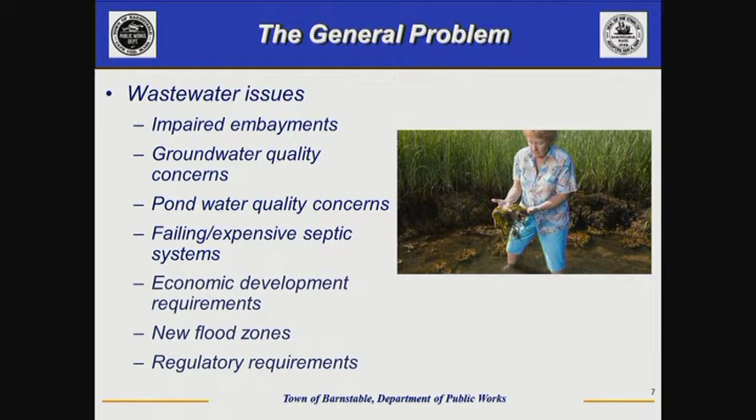The county and the Cape Cod Commission championed what you've probably heard of as the 208 process. The 208 process is a Clean Water Act report that they needed to update, but that really focuses on the embayments, principally marine embayments, and principally nitrogen to those embayments. Nitrogen in a marine environment is the limiting factor to growth—everything else is present for algae to bloom or other things to rapidly grow, with the exception of nitrogen. So if you add nitrogen, you will cause rapid growth. Conversely, in ponds, phosphorus does that, not nitrogen. So freshwater, phosphorus causes rapid growth; saltwater, marine waters, nitrogen causes rapid growth.

Where that nitrogen is coming from is listed here under the origins on the slide. This is from the 208 report itself, and the two charts here basically show similar versions of the same thing. The one on the left is total nitrogen within the system, specialized to Cape Cod. Though it's difficult to read, the blue on the far right is septic load—about 65 to 67% of the total nitrogen on Cape Cod.

More interesting is the chart on the right—that's total controllable nitrogen, the nitrogen we could potentially affect. Basically, atmospheric deposition has been taken out. What you'll see there is that septic load now accounts for 70 to 80% of the total controllable nitrogen on Cape Cod. It's also interesting to note that fertilizer is about 9% and stormwater is about 9%. So those are the three highest nitrogen contributions that we can change or in any way control going forward.

All right, so back to the fundamentals. Let's talk about what nitrogen in a system does in a marine body. If we have a healthy ecosystem with healthy levels of nutrients, algae growth will be limited by the lack of nitrogen. Sunlight will penetrate the water, and you will have aquatic grasses—in our case eelgrass—that will grow. They'll provide habitat, provide food, and also create oxygen. And organisms are happy, healthy, and do their thing.

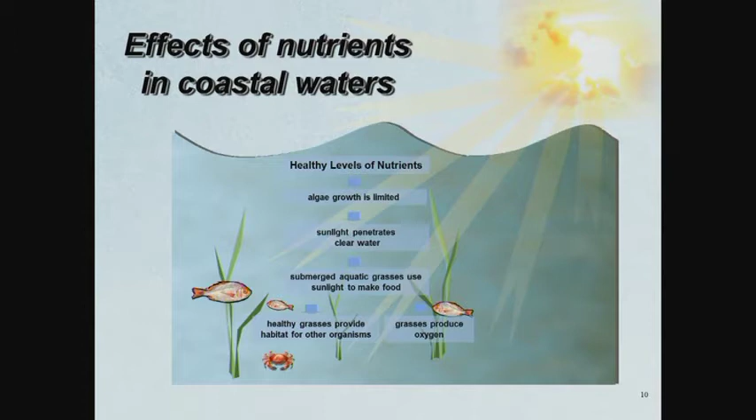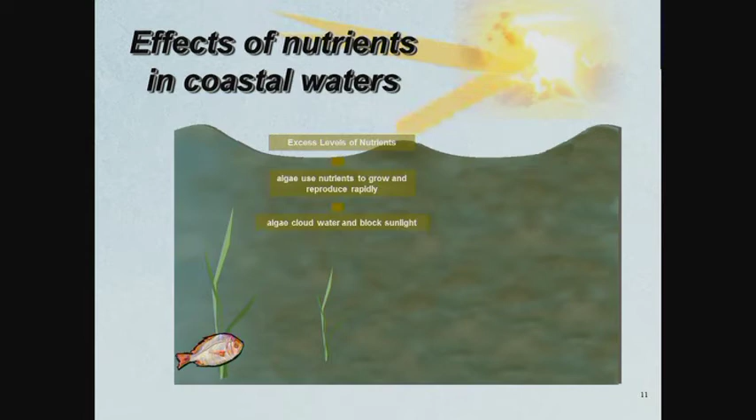However, if you're in an environment with excessive nutrients, the water will become cloudy because algae will start to grow rapidly. That will block sunlight, and the grass populations will not thrive in that situation. Additionally, as those algae start to die off, bacteria at the bottom will start to consume them. Those bacteria use oxygen as their terminal electron acceptor as they convert that organic carbon into energy and fuel, and in the process they will start to decrease the dissolved oxygen levels in the area. The loss of habitat comes from the loss of the grasses, and then those creatures that can leave will leave, those that cannot will perish.

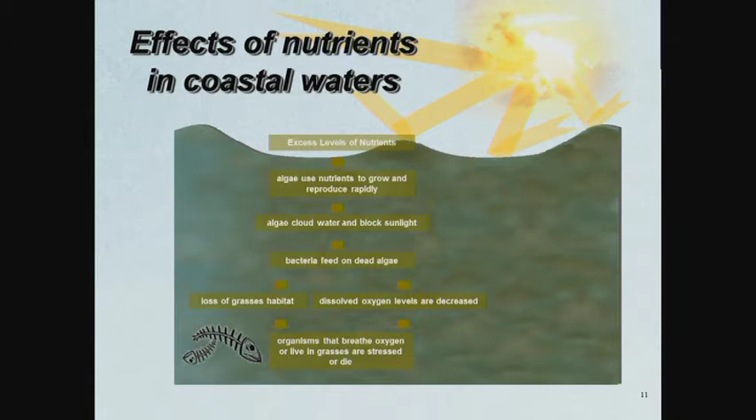So the regulators saw this and said, okay, we need to start to address this issue. About a decade and a half to two decades ago, they came up with the Massachusetts Estuaries Project, where DEP, along with UMass Dartmouth, teamed up to look at this problem. They're looking at it across 89 estuaries in southeast Massachusetts, not just Cape Cod. UMass Dartmouth came up with a land use model which takes a look at how land is utilized and then predicts how that will affect the water bodies associated with that land.

DEP then takes the results of those studies and creates what's called a total maximum daily load—TMDL, one of the acronyms on your sheet. Effectively, that's a budget for the water body, for nitrogen in this case. It could be for other things, but the TMDLs we're speaking of tonight deal with nitrogen. So that's the nitrogen budget for that water body.

Eelgrass has been used by DEP as the Sentinel Station and by MEP. So if you read their reports, you'll see they're talking about eelgrass populations, what were there in 1951 versus what's there now. They use that as the canary in the mine to indicate health of an estuarine system. And then they divided the Cape into watersheds.

Now, I had a presentation not long ago where I went through the vast majority of it, and afterwards a person came up to me and said, all good, but what's a watershed? I quickly realized that that wasn't good, that person didn't follow along. So I've thrown a slide in here to talk about what watersheds are. I apologize if you already know this, but want to make sure everyone's caught up.

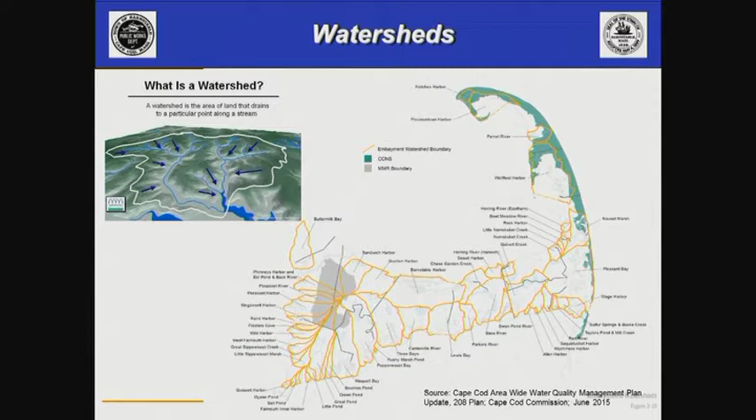So as you do wastewater planning, you have to think about what those other communities are doing to deal with the watershed, to deal with that embayment you're particularly trying to work on. This is the watershed map for the town of Barnstable. Barnstable Harbor is to the north, Nantucket Sound to the south. There are 3 principal watersheds on the south side: Three Bays, Centerville River, and Lewis Bay. The Barnstable Harbor watershed has one sub-watershed aspect at Millway that's affected. You'll see numbers within them.

In the blue on the left, Three Bays, there's a 60% number. What that tells you is that in the Three Bays watershed, to regain a healthy ecosystem, modeling predicts we need to remove, on average, 60% of the controllable nitrogen load from that watershed. For Centerville River, we need to remove 34% of the controllable nitrogen load. For Lewis Bay, 23%. For Millway, 65%.

Now, Halls Creek has a plus 57%. What that means is Halls Creek has assimilative capacity - that ecosystem could actually have more nitrogen go to it and remain healthy. So you have these three things. Now, there's some nuance that needs to be understood about this. These numbers you're seeing here - 60%, 34%, 23% - represent the amount of existing nitrogen that must be removed.

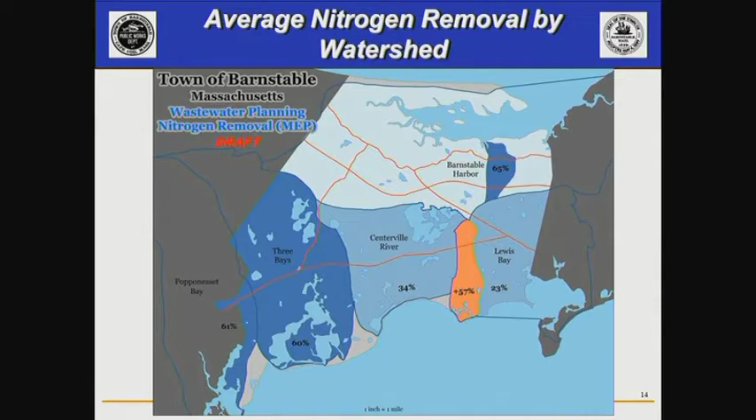But again, as we talked about at the beginning, nitrogen is not the only issue that may be a reason to be looking at wastewater planning. In fact, there's a whole list of things ranging from phosphorus in ponds - and again, we mentioned Lake Wequaquet a minute ago - to contaminants of emerging concern, to PFOS and PFOA that also have to be considered as we're looking at this plan, and the committee did that.

At the end of the day, if you really think about it, what they were trying to answer, and what we as a community are trying to answer, is this question: where are Title V systems, as they are currently configured, appropriate to provide us with the environmental protection we want, and where are they not?

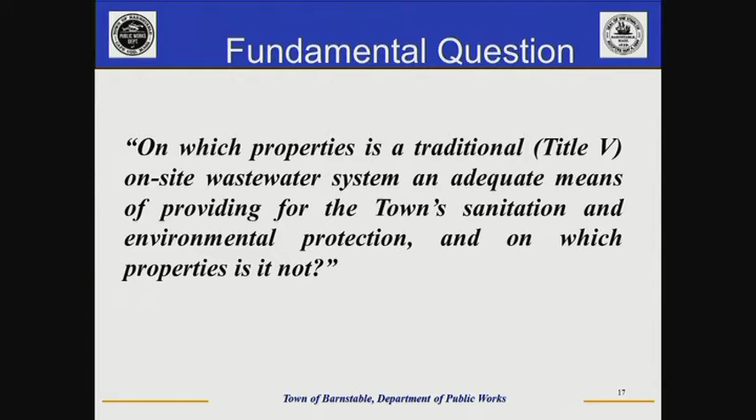So let's take a step into what the process of planning is. I'll go through this reasonably quickly. When you're creating a plan, you're looking at effectively 5 needs.

You're looking at normal sanitary needs, and those are the things that we've traditionally always worked on with wastewater planning before nutrients became the issue. That could be poor soils, high groundwater, etc.

There's also convenience and aesthetic issues. Areas where there's high groundwater and you have to mound all these systems in a way that's not palatable to the community, or where you have to have excessive pumping of existing systems.

We have protecting groundwater and water supply issues that we need to consider. And that's what we've talked about in terms of CECs and freshwater, and then nitrogen, looking at the embayments, and then phosphorus on ponds.

Protecting surface waters, and then enabling desired economic growth where we want it. Again, the community may choose to have some economic growth in certain areas and need wastewater infrastructure to do that.

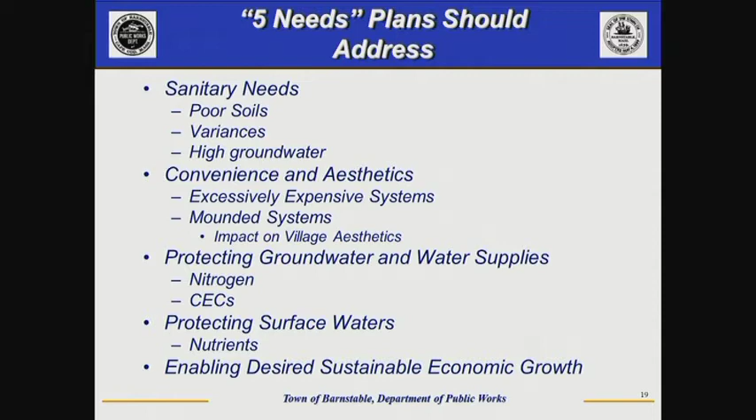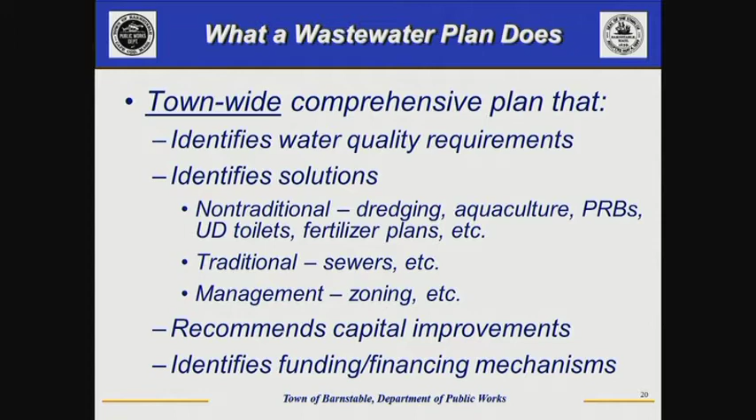So what a wastewater plan does is this: it is a comprehensive plan that looks town-wide at all the needs, then looks at the potential solutions to those needs, marries them up into a plan, and then starts to package those as capital projects. You'll see by the end of this presentation we've already started to do that, and those capital projects go to town council for approval.

The plan is divided into 4 phases. This is very traditional in CWMPs. The first phase is needs assessment, where the community looks at itself and says, okay, what are our needs? It then looks at the potential solutions, develops the plan, the final phase being the environmental piece, which is the submission of environmental notification form filing.

Before we get too deep into it, I want to touch on this, that it needs to be understood by everybody that this plan, and all plans, are a snapshot in time. It is adapting and changing.

So, for instance, what was presented to the town council in August of 2017 has changed and morphed over the last 2 years based on input from the political people, but also based on input from the community, and is now what it is today.

The perfect example of that is when this plan first came out, it came out as a 3, 20-year phase plan for 60 years total. We started presenting this around the community in a number of different places, and the feedback we started getting loud and clear was, we like the plan, we like the fact that you're getting after this issue, however that is too long. It needs to be shortened up.

Going back to that team leadership discussion that's been happening every Tuesday, that came into that group, and there's a lot of talk and a lot of debate about what should be the right answer there. It's now landed on 3 10-year phases for a 30-year plan versus a 60-year plan. That is one example of the changes, and there's been many of them that have happened since then.

Other things that have happened is there's been some opportunities that have come up. Vineyard Wind, you may have heard of, is going to land in Barnstable. When that decision got made, it became apparent that there were some synergies that could happen with them, with the sewer installation. So areas that originally were not going to happen in phase 1 are now happening in phase 1 because Vineyard Wind is enabling that to happen, and there's money savings to be had by doing that, et cetera.

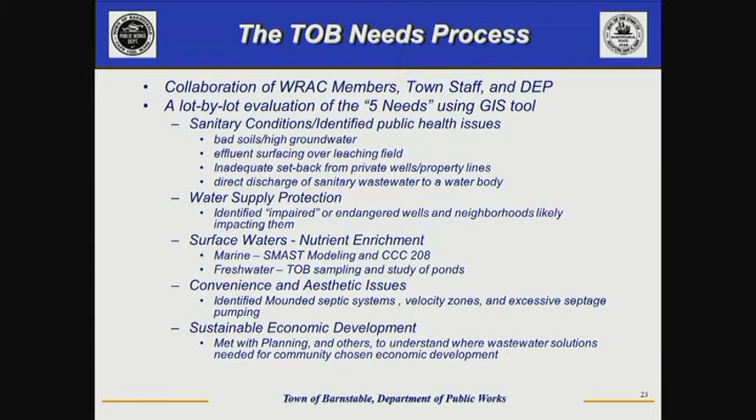So our needs process looked like this. The WRAC, with the staff that I showed to you, got together and they came up with a tool. Amanda Ruggiero, who used to work here in the GIS department, was a principal author of this tool, where it looks at all those needs we talked about and sort of lays them on top of each other in a graphical way so you could visually see where certain things were required and where they were not, and what value certain technologies would have and other technologies wouldn't.

What the tool found was this table here, among others. On the left-hand side, you'll see Watershed. This conversation is going to become a watershed discussion pretty quickly here, where the different watersheds are listed. You'll see the water use within that watershed, the wastewater that's generated in that watershed, and the amount of nitrogen that's created town-wide across all those watersheds.

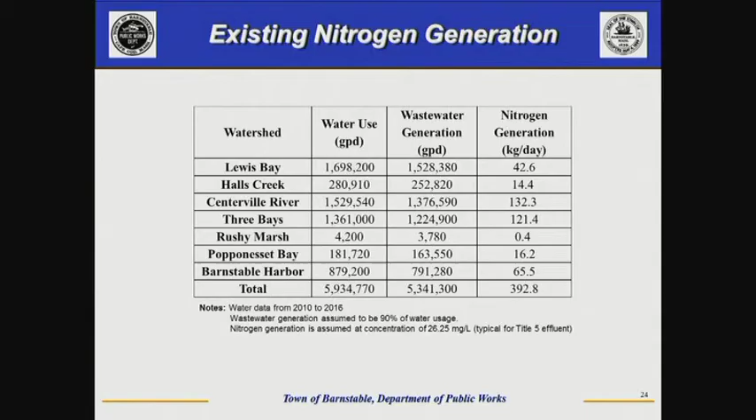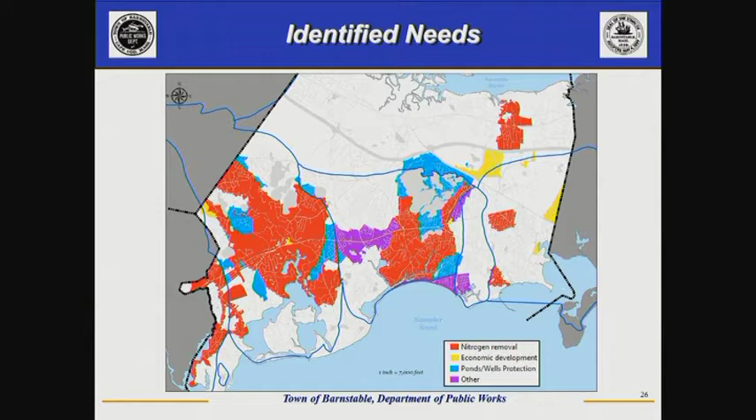So, solutions. The solutions tend to fall into three broad categories: traditional solutions, non-traditional solutions, and management solutions. I'll talk about each one briefly here.

Traditional solutions are going to be what you would probably consider: pipes, pump stations, and a wastewater treatment facility. Effectively you go into the community, collect the wastewater, send it somewhere else. It may actually be in that community, but you send it to a treatment area, it gets treated there, and then it gets disposed of.

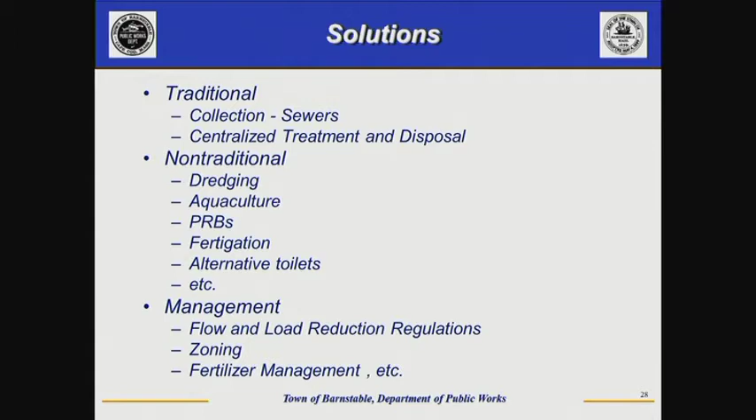Non-traditional solutions tend to be things not like that - dredging, aquaculture, permeable reactive barriers, which we'll talk about in a minute, fertigation, alternative toilets, alternative septic systems - not the traditional methods. Then there's management, which is really looking at zoning as we talked about, but also things like fertilizer regulation, flow management, and stuff of that nature.

Before I go forward, I've had a number of questions on this, so I want to spend two slides talking science. I apologize, I'm an engineer and I'm a geek, so bear with me on this. This is sort of how I look at wastewater treatment, and hopefully it'll help you guys think about it.

I grew up in Maine and worked on a farm as a kid, so I kind of think this way: wastewater treatment is effectively inverse farming. If you think about what a farm does, particularly a farm for animals, you have animals, you're bringing animals food because you want to grow the animal. You want it either to pull your cart, use its wool, eat it, use its milk, or have its eggs - there's something you want from that animal. The food is what you bring to it for the animal to thrive and succeed.

What they do is take whatever organic matter, food, plus oxygen, and make new cells and energy, and a bunch of other stuff. But what's really relevant is new cells and energy - that's farming. What wastewater treatment does is put that on its head. It's about the food; the animals are kind of a byproduct.

Why I say that is because you have a wastewater stream with a lot of organic carbon and food in it. Back in the day, in the 60s, before the EPA came through in the 70s and started really making this treat to BOD - biological oxygen demand - and TSS - total suspended solids - Lynn, I got you this time. Back when that wasn't happening, those flows were going out to riverine systems, and there was explosive growth. Oxygen levels were getting killed, and they were having die-offs.

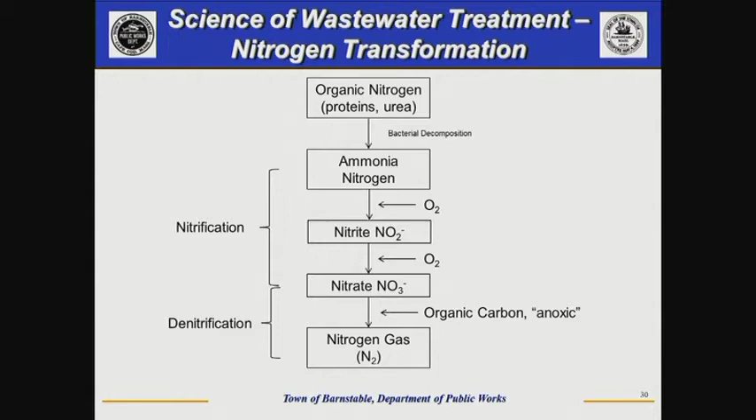Okay, traditional wastewater — science geek part's done, sorry. So traditional wastewater, as we talked about, is just you go into an area, you collect the wastewater, you transport it to a treatment facility, and then you eventually dispose of it.

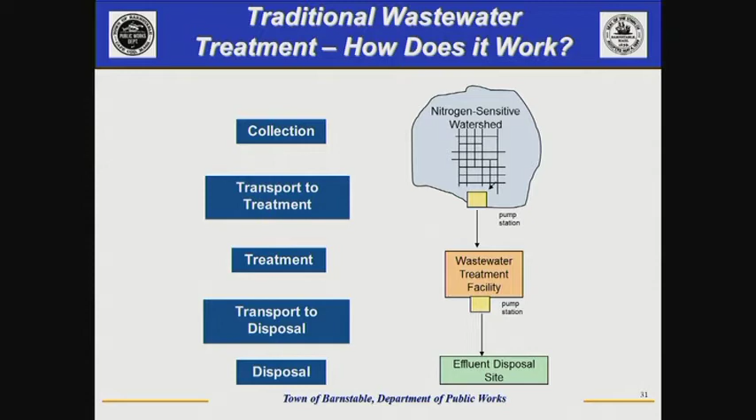That can happen within a community with a communal septic system, or again, can be town-wide or even larger with very large treatment plants. Because we've had questions on how you do that collective process, let me spend a minute on this slide.

So what effectively happens is you have your homes here, and they, by gravity, generally, send their flow to a pipe out in the street. And by gravity, it means the pipe's pitched downhill, so water will flow down the pipe.

Well, at some point in time, that comes to a low point and needs to get boosted up to the next high point to be able to flow by gravity again. And so there's something called a pump station there.

All a pump station is, effectively, is a tank with a pump or two in it that have a float system. And as that tank fills with wastewater, it senses where it gets to a high point, turns on the pumps, pumps it up the hill to the next part of gravity, and then when it empties the tank, it shuts itself off. The pump station probably isn't right in the road as shown here.

It's usually off to the side. There's a number of ways you can do those pump stations, but effectively that is the system. You try to use gravity where you can, and when you can't, you pump it up to where you can use gravity again. Make sense?

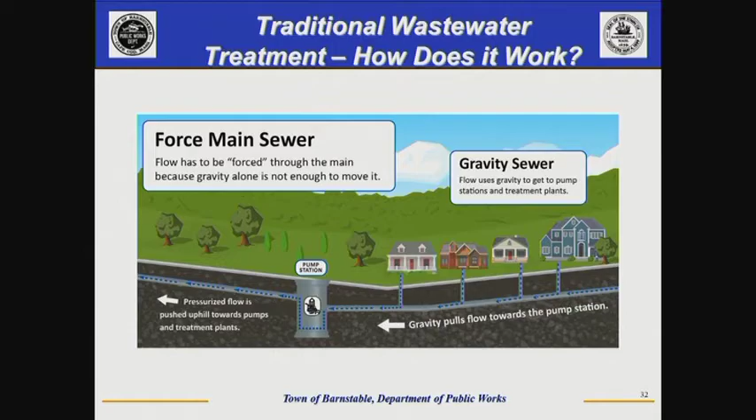Briefly, to sort of talk about how our facility works: flow comes into the front end, it goes into a headworks area, and in the headworks area, really what it does is screen out big chunks and settle out dirt, grit, sand, things of that nature. So it degrits it and screens out the big chunks.

From there, it flows to what's called primary clarifiers. Those are very large round tanks where it can go and sit. And the reason why it does that is so that anything that can settle will settle out of it.

Now, from there, it flows out to two more clarifiers called secondary clarifiers on the backside. In those clarifiers, all the bacteria and bugs that were consuming that food get separated from the effluent because they sink. They're not good swimmers, so they sink to the bottom and either get recycled back or wasted, depending on the age. Then it goes out, gets disinfected, and heads out to the sand bed.

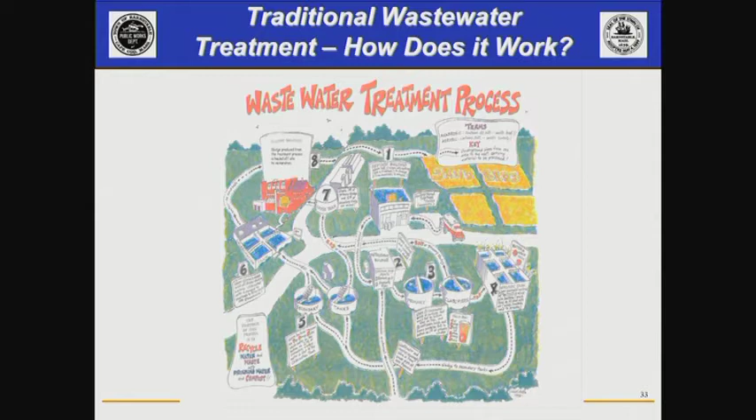It's called a permeable reactive barrier, or PRB, as you'll hear it referred to. It's really a very simple technology in many ways. All this is doing is a trench or a well that has in it an organic carbon source—often wood chips, could also be compost, could also be vegetable oil if it's a well type—where it's going to intercept nitrogen-rich groundwater.

Now, based on the science quiz—and you guys didn't know there was a quiz to this, but now we're going to do this—if you have an area in a trench where there's not a lot of oxygen present, and you intercept nitrogen-rich groundwater, and there's bacteria and organic carbon here, what's going to happen? Come on, people, we just did this. Denitrification, sir. My apologies.

Yes, sir. Correct. No, I'd said previously it's got to go from urea to ammonia to nitrite to nitrate, and then denitrification. Yes. So it'll come in, the PRB would then intercept it, biota would do that, nitrogen gas would escape, and then the backside would have less nitrogen in it.

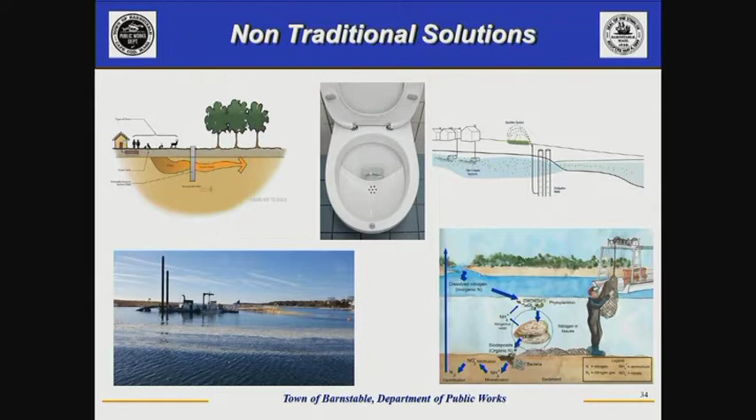Management solutions. As we talked about, fertilizer management, fertilizer is about 9%. The town has a fertilizer management program. Unfortunately, what has been found with these programs is that they're very difficult to enforce.

You might remember like 4 or 5 years ago there was an educational program talking about Cape Cod lawns and trying to encourage people to adopt them. The ideal is a lawn that's brown with dandelion green tufts throughout, not looking like what we traditionally think of as a healthy lawn.

But we all know with the Cape soils that most of the time to achieve that healthy lawn, you need to lime it, fertilize it, and water it. So it hasn't gone far, and unless somebody's willing to go around and enforce it, that's a difficult bar to get meaningful results with.

Zoning, as we talked about, is going to be necessary in a number of ways to deal with potential growth that comes from the infrastructure we put in. However, there's also discussion about the future.

Remember we talked about it being 60% of existing, 100% of the future? Well, one of the ways you can deal with 100% of the future is you can zone it to not happen. I'm not saying the community wants to do that, but as we were thinking of solutions, it's one we had to at least consider: you can use zoning to regulate future growth particularly.

And then finally, water use, and that's really speaking to education, an education piece to the populace to try to get them to decrease water, decrease fertilizers on their property, and do the right things. That does get wrapped in.

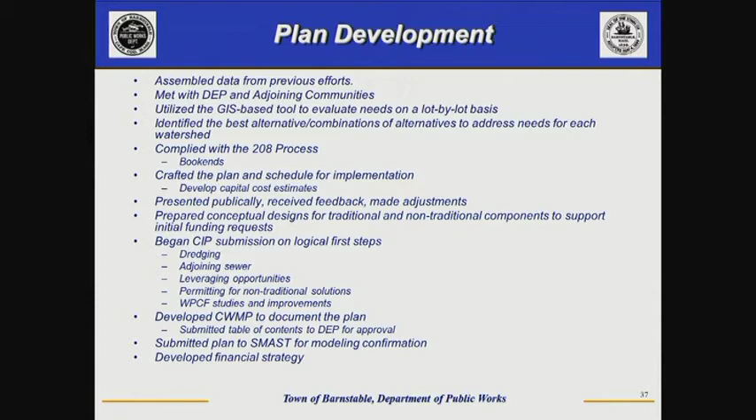I'm happy to say we've gotten some initial results back from them. They've taken our plan, rerun it through all the models they have, and feel that the plan will achieve what it's supposed to achieve and will gain the environmental benefit it's supposed to. So we're very happy to see that.

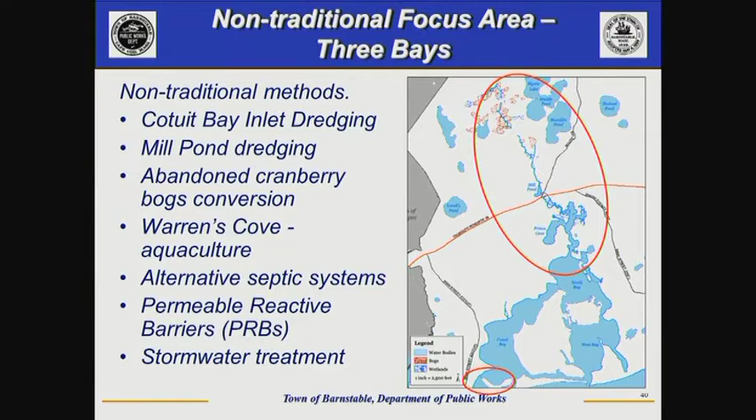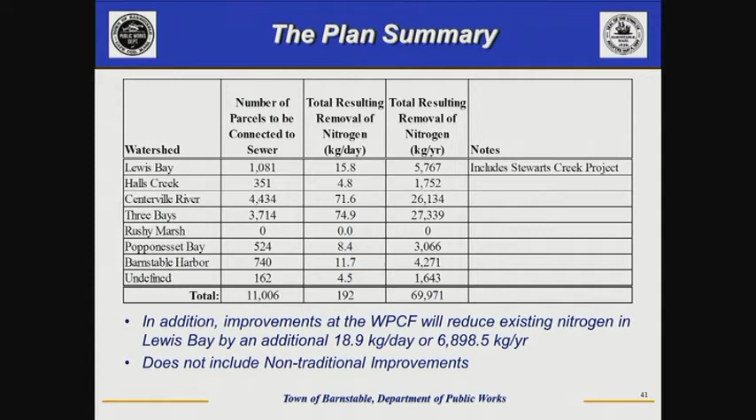So that is part of this plan. What is not in this is the non-traditionals, as I mentioned, and the fact that we're seriously considering, for a number of reasons, putting a denitrification filter on the treatment plant, and how the results of that will incorporate. If you want to look at it by stages, this is here.

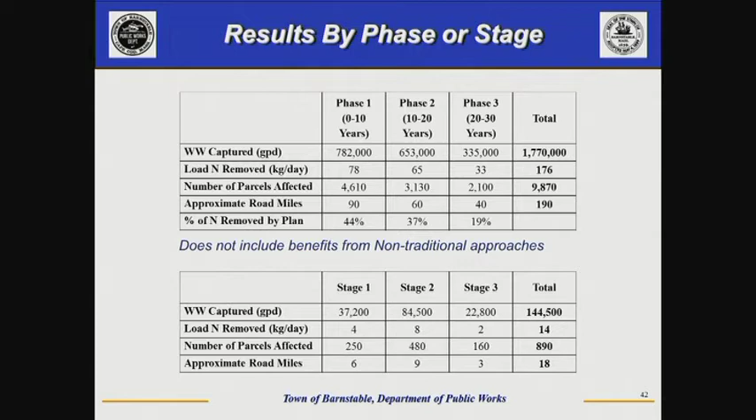Finances. I'll go back to my caveat from the beginning: I am an engineer, I'm not the financial person. If you want a very in-depth discussion on the financial piece, I highly recommend you go watch Mark Milne's discussion with Town Council that occurred on October 3rd. You can go on the town's website and watch Town Council meetings there, even by chapter, so you don't have to watch the whole meeting, just to see that I can talk if I try. It's a very in-depth discussion. I'll do my best to relay some of the big picture concepts, but that's really where you need to go to get an in-depth look.

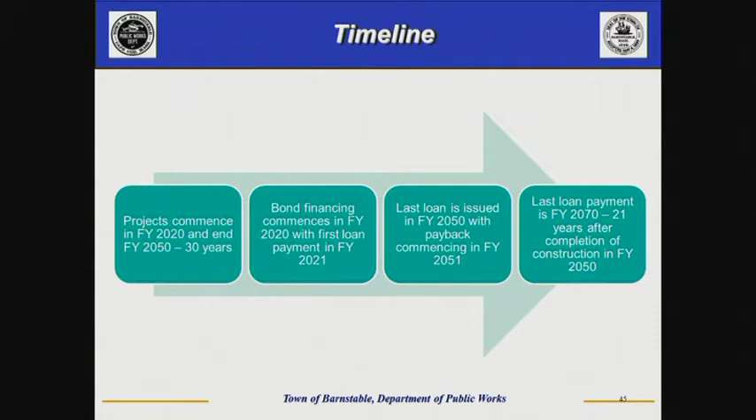What this chart shows you is that though the plan is a 30-year construction plan, it is a 50-year financing plan, because the last bonds are issued in the 30th year. They're 20-year bonds, so they won't mature until the 50th year. 30 years of construction, 50 years of financial activity.

There's a number of funding sources that they are looking at to try to make up that $1 billion. At this point, I'll tell you what's been said in Town Council: the expectation of the Town Manager and Mark Milne, the finance director, is to have a long-running conversation with town council working this issue.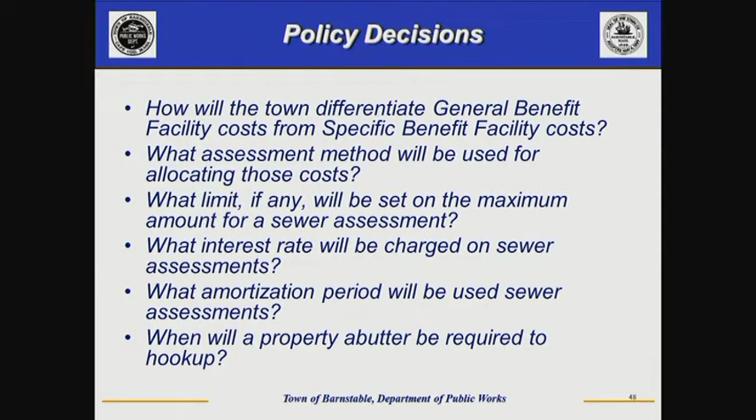The way this plan gets implemented through town council, as we discussed earlier, is via CIPs, capital improvement projects. The capital improvement project side and the ops budget side are part of the town's budgeting process. The CIP brings forward things greater than $50,000 that happen in short confined periods, generally 3 years, worked through as projects. These will all come to town council in that mechanism, getting preliminary design, final design, and coming to town council for money to do the construction piece.

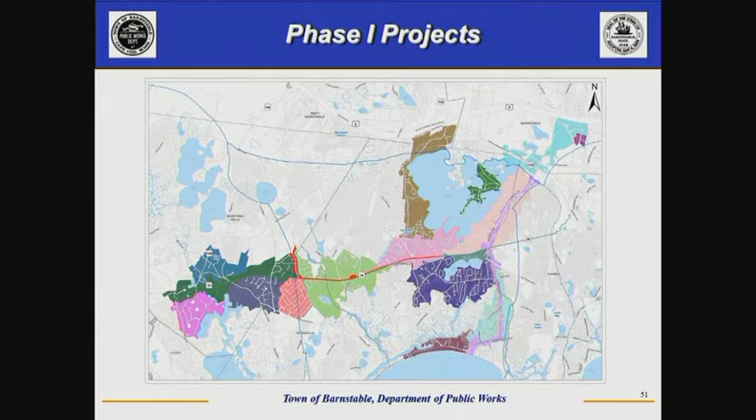This is how they're all going to break out. You'll notice there's about 20 projects in about 10 years. There will be a lot of construction in the community, and we have not yet figured out, or we're continuing to work on, how best to sequence this to keep the pain to a minimum for any one human being — you don't want construction in front of your house for 3 or 4 consecutive seasons.

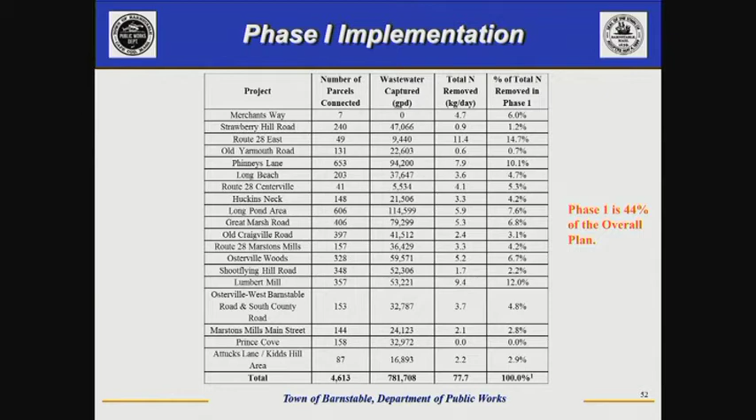Yes, sir. Oh sorry, I thought you had your hand up. So we are continuing to work on how this works out best. What you'll notice is this 100% means we've achieved 44%, because this is only phase 1 of the plan.

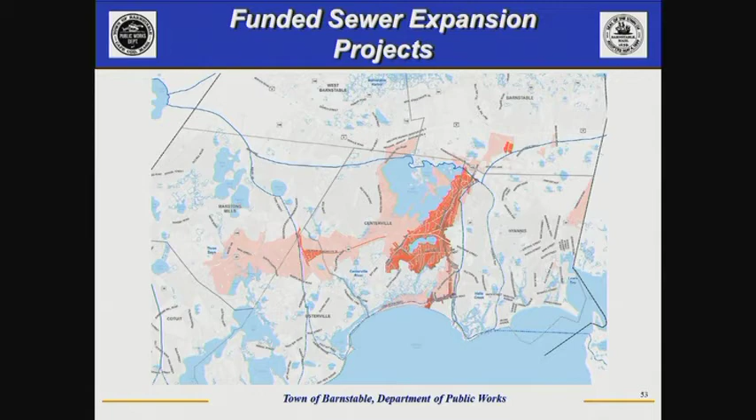Now, these slides are meant to speak to a myth. Prior to coming to the town, I was a consultant for a number of years working with communities. As a consultant, you'd traditionally go into a community, come up with a plan, present it to decision makers for about 40 minutes, they'd have about 20 minutes to ask questions, they'd look at it, get intimidated by it, put it on a shelf, and not do anything with it. That's happened a lot — you don't have to look too far beyond our borders to see communities with plans in place they're not able to move on.

This town council is completely opposite of that. This town council has aggressively been moving on this since 2017. The plan was presented to them in August of 2017. The town council vice president at the time came to us immediately and said, okay, that's good, let's start seeing some projects, we want to start to implement — how can we start moving this along?

What you'll see over the next couple of slides, and I won't read them all to you, is somewhere on the order of $22 million of work that has already been appropriated by town council to start to get after this issue. I say this because this is not a council that has been hesitant about affecting the community positively regarding nutrients or implementing this plan. They are actively moving forward with it as we speak, and there's a number of pages of this.

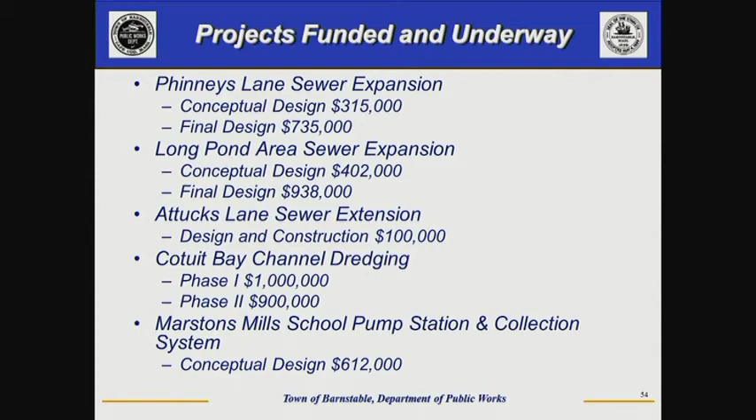And that brings us to next step. So we are continuing this dialogue. We've had conversations in a number of villages. We're going to continue to do that to try to make sure we can bring this word as far as we can bring it.

There's other means of public interaction and outreach also happening. In the meantime, we are collecting comments on the draft CWMP. That will get submitted to DEP and Cape Cod Commission and eventually the MEPA process, hopefully in about a month's time. We've had an outside consultant firm look at it and do value engineering. In fact, we just got that back today. We've had SMAST model it to make sure it's going to be effective, and we've gotten preliminary results back from them showing that it is.

And then we're going to keep pressing forward. As I mentioned, this town council has been very aggressive and working very hard at this issue, and we have been preliminarily designing some of those early projects and early plans to try to be ready to move very quickly.

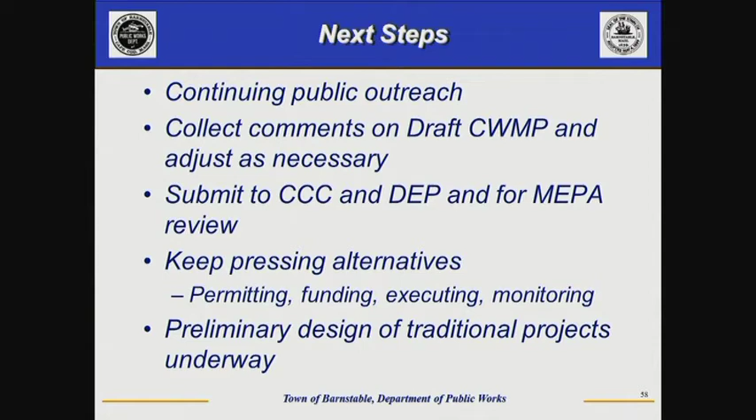And with that, questions? And remember, we have to get the mic. You guys have been a very quiet crowd. Last night I got beat up for like the whole thing. What can I answer for you? Yes, ma'am.

Who is or what department is responsible for the maintenance of town property, and what might be done before, in conjunction with this project, as far as the town use of fertilizer—and I don't even want to get into Roundup, but it's fertilizer.

So both answers are us. We as DPW are the spearhead on the CWMP plan that you just saw. We also are the department responsible for maintenance of town properties. So the conversation's happening internal to us, to try to work on fertilizer usage and stuff like that. Much of our department, particularly our cemeteries department, has been very proactive in this issue, leaning way forward in terms of organic substitutes for things like Roundup, and looking at organic uses for fertilizers, but the conversation will have to continue. So all that reigns within our house.

Yes, ma'am. The state of Commonwealth has had a $1 billion excess for the last two years. Could we receive any money from that?

So the plan now is this is going to happen immediately because of the enabling of Vineyard Wind. This is then going to happen probably next, because this is the pump station that enables all of this, and everything out west, to happen. That'll put a pump station in there, gravity sewer the north side of Long Pond, and bring a force main back to the treatment facility. After that, we start getting into discussions about what's the next logical piece. The plan's taking a shot at it, but as we learn as we go, we may find we're better off jumping on Phinneys Lane, or Long Pond, or continuing out Route 28. That's a discussion that's going to be happening.

Part of what that will feed into is the discussion that happened earlier on the treatment plant - is the treatment plant yet ready to accept those neighborhoods, or are we just getting backbones in initially while the treatment plant gets to where it needs to be? Does that make sense? Yeah, I see it a little better. Thank you. Other questions?